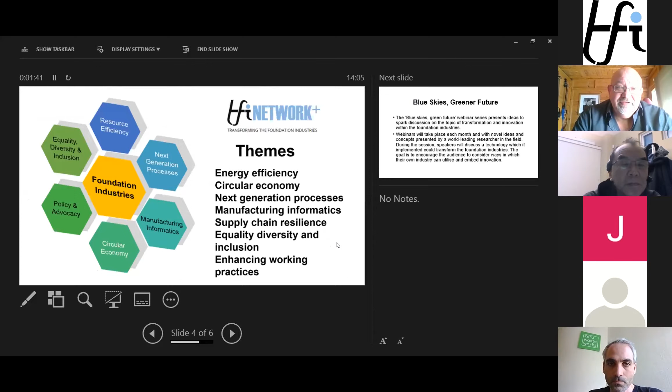And today's lecture from John fits into one of our major themes, which is to look at next generation processes and concepts that could influence the foundation industries. If I go to a more succinct description of what we're going to try and achieve with the Blue Skies Greener Future webinar series, topics of transformation and innovation within the foundation industries. We're going to have a lecture each month. We'll probably have a break over summer that will start again in the autumn.

Each speaker is a genuine world leader. I'm not just blowing smoke there. John is a real world leader in cement research and technology, who's at the University of Sheffield. And each of those leading speakers is going to present some potential transformative aspects for the foundation industry. And it's blue skies. It's not something you might consider to introduce tomorrow, but it is something that is worth considering for the future and could be absolutely game changing. And that's the purpose of these webinars, starting with John's talk today.

I'll let John introduce his title, but I will, as is customary, introduce the speaker himself. You can read what I've written here. I've stolen this from his webpage, so I think it's reasonably accurate. John is an Australian, or has an Australian background. He got his degree, chemical engineering and applied mathematics from the University of Melbourne. Disappointingly in 2002, I think my degree was significantly before 2002. His PhD was in chemical engineering at the same institute.

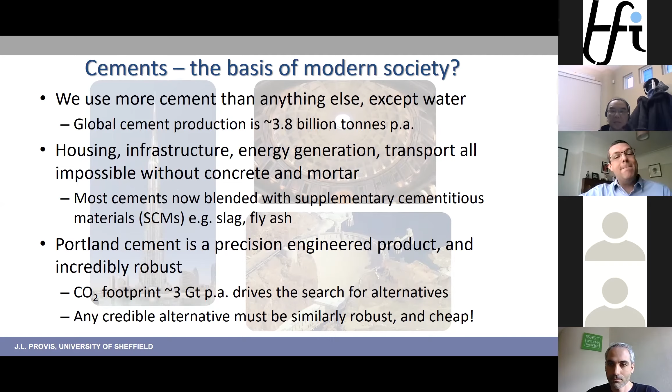I describe it as one of the closest things to magic the human race has managed to come up with. And I say this not understanding how magnets work. They're magic as well, by the way. Cement is a magic material and we can't lose sight of that.

So if we look at where we are now, what's our current status as we are assessing the CO2 footprint, assessing the emissions footprint overall of the built environment, which is where we use most of our cement. By the way, it's roughly a 3-way split as we're using cement between reinforced concrete, so concrete with steel in it, unreinforced concrete, concrete blocks, concrete bricks, paving stones, tiles, these types of things, and mortars, renders, and other products that aren't concrete. Roughly split cement production 3 ways worldwide between those 3 categories.

If we look at the building stock, you can see greenhouse gas emissions per building for a new construction, the construction and maintenance segment of that. I'll pull up the laser pointer so I can wave at some of these things. So the construction and maintenance section of the building breaks down into all the bits and pieces that go into it. Concrete is that slice, and there are various contributions to 1 cubic meter of concrete, the CO2 footprint of that. And then you take cement, being by far the largest component of that, and break that down into actually where the emissions are coming from in producing cement itself.

By the way, these figures come from a paper that we developed through a United Nations Environment Working Group on low carbon cement and concrete. If anyone would like a copy of this, please drop me an email. I know not everyone subscribes to this. It's quite a new Nature Publishing Group journal, Nature Reviews Earth and Environment. I'm happy to email out copies of this upon request.

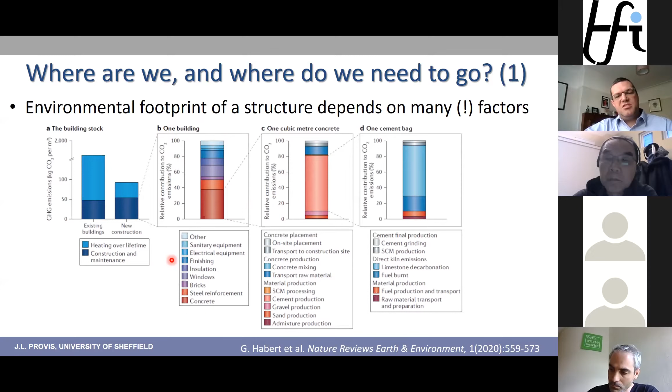So as we're looking at the different steps in this value chain, as we're trying to innovate sustainably, the question is, how can we use everything we know here to develop a value chain that works sustainably? There are many points in this value chain that we can attack for this. Where we need to get to, well, by 2050, we've got a legally binding target for net zero. So that's unquestionable. We need to do that.

The large process facilities that are producing cement, and a medium-sized cement plant is in the hundreds of thousands of tons per year throughput scale, which is absolutely mind-boggling to those involved in most process industries to think about processing multiple hundred thousands of tons per year of a powder product. These facilities are capital intense. They're designed to operate for 40 years or more. There are cement plants in the UK that have been operating for more than 90 years, replacing, retrofitting, reinstalling new equipment on the sites. But equipment that was installed in 2010 will still be operating in 2050.

So is it already too late to fix the problem? Well, it can't be. To some degree, it is. To some degree, the carbon emissions are already locked in from this equipment because value on the assets has to be returned. But we can't possibly let this restrict what we're doing.

What we need to improve is every step in our value chain. We need to improve how we use concrete in structures. We need to design better. We need to improve how we use cement in concrete. We need more efficient materials usage to go into that structural design. And we need to better use materials to make cement.

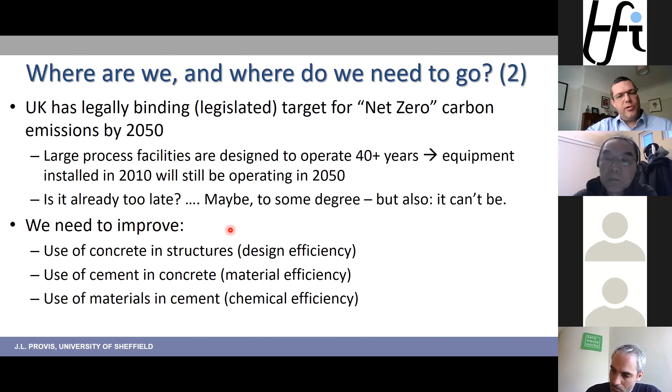But where are the opportunities to improve? This is a graphic and an illustration from that paper I mentioned before. Going from raw material extraction through to building use, demolition, recycling, recycled aggregates going back in, replacing part of the material in the concrete, and using alternative fuels. A cement kiln is an incredibly effective waste incinerator. Looking at alternative raw materials, looking at blending with all sorts of different things. There are opportunities everywhere. And what we need to do is to exercise the right opportunities.

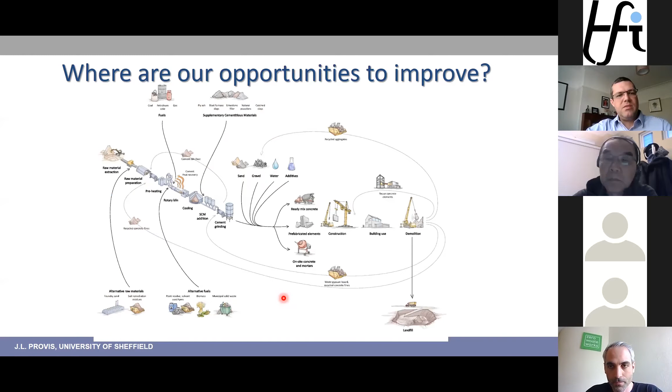So here's some assessment that we looked at with designing buildings better. So designing for reuse, or designing each element of a construction using different concretes more flexibly, and maybe using precast elements more flexibly, design each part of a building to withstand the actual type of exposure, environmental exposure, that that piece of the building is going to be exposed to.

So current practice in a lot of building design is to use a couple of grades of concrete for the whole building. So say if you're building a high-rise construction, 8 floors above the ground, you've got concrete elements that are designed to withstand the splashing of the salt that's put on the road for de-icing in the winter. Now, if you're splashing 8 floors up, you've done pretty well. That's better than Sheffield traffic will give you.

But we need to bring in, even at that design level, more subtlety, more sophistication in choosing and specifying how we're putting together a structure, whether it's with an integrated structure, whether it's elements that are going to be reused, rather than building a set of shoebox apartments in the city centre and then coming along 20 years later to knock them down and crushing up the concrete into lumps. Even if those lumps are recycled, you've got a concrete that was designed to last maybe 50 to 100 years, and you've demolished it after 20. So those elements can be reused. We can optimize structures, optimize structural design instead of just a rectangular cross-section, something a bit more clever with them.

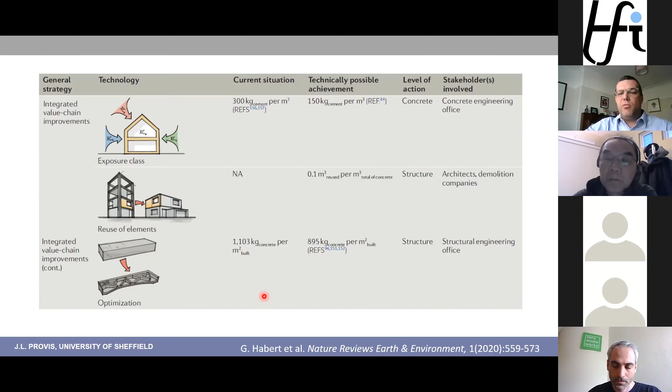Now, those structural engineering aspects are... I introduced myself as a chemical engineer. I've talked a lot about structural engineering here. I am by no means an expert in structural engineering, nor do I pretend to be. But it's essential for those on the materials design side to think about how exactly we're going to be using

the material. So when we look at using cement clinker, cement clinker being what comes out of the Portland cement kiln before it's ground, we've got as demolition waste a source of raw material that may already be partially or largely decarbonized. It's had the CO2 removed already. But can we reuse demolition material fines as a raw material to make cement? It's limited by the composition of the raw mix, but this does look possible.

We need to pack particles together better into concrete. So we look at, as a functional unit for concrete performance, how many kilograms of cement per cubic meter per megapascal of 28-day compressive strength. At the moment, 8 is about the figure we're looking at. Figures of 4 have been demonstrated. So we can get the same performance from the concrete in a normalized manner with half of the cement content by better packing the solid particles we're putting in there so that the aggregates pack together more tightly, still having a flowable material.

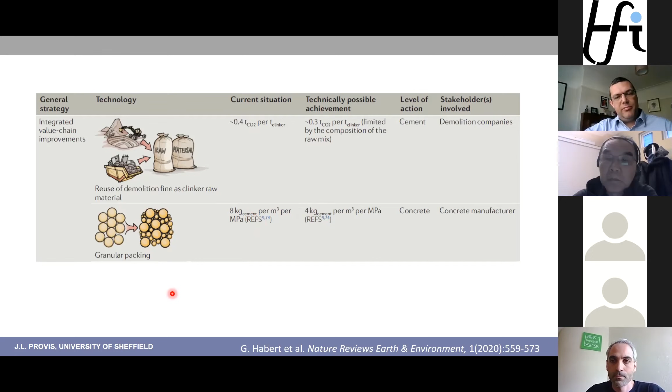We can improve the energy efficiency of clinker production. Again, I said that we're already doing pretty well. There's a bit of scope there. By using alternative fuels, we can reduce the attributed CO2 per megajoule that goes into actually producing the kiln.

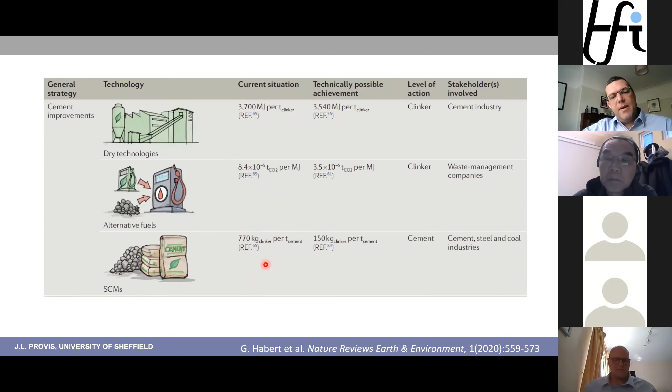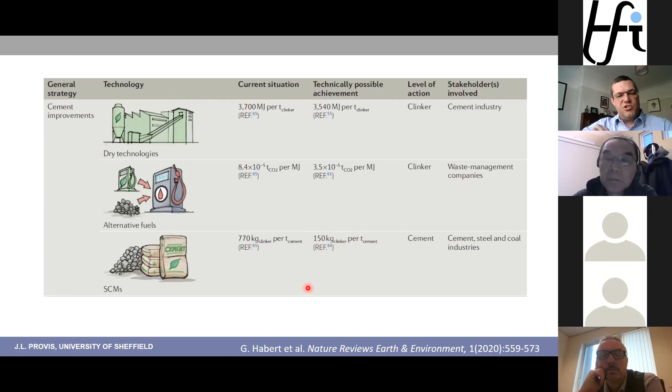Blending with supplementary cementitious materials, if we can source the materials, we can reduce our clinker content per tonne of cement from a current level of about 770 kilograms of clinker per tonne of cement, the cement being roughly 77% Portland cement kiln product and 23% gypsum and supplementary materials. We can change that to as low as 150 kilograms of clinker, so 15% Portland cement in a tonne of cementitious material, if we can find the slags, the ashes, the calcined clays, finely ground limestone, all these things that we'd like to blend to reduce the CO2 footprint, to reduce the clinker content of our cement and therefore our concrete.

We can look at carbon capture and storage. And there's actually a roadmap, and it's a really interesting read, in the UK cement and concrete sector, a roadmap to reach net zero, which leans very, very heavily on carbon capture and storage and requests funding from the government to please support us to achieve this. Now, a cement plant is one of the best places to implement carbon capture and storage if that's what you're looking to do. Very CO2-rich flue gas stream. But there are a lot of technical and techno-economic challenges around carbon capture and storage that need to be solved.

My personal opinion is we can't rely on carbon capture and storage to get us where we need to go. I don't think carbon capture and storage will do enough for us that it can be a key pillar of where we're going. I very much hope I'm wrong. I hope that it's a valuable part of our toolkit for carbon reduction, but I don't think we can assume that it will solve as many problems as it's being proposed to solve. Again, for those in the sector, those involved in CCS, please prove me wrong on this. I'd love to see that.

We can look at alternative cements. And it is technically possible to produce cement at 0 CO2 attributed emissions. It's not easy. A lot of alternative cements are looking at savings between 20%, 40%, 60%, some up to 80% savings. Now, in most industry sectors, if you say, oh, I've got an option that will save 20% of CO2 emissions sector-wide, you'd be having people bashing your door down.

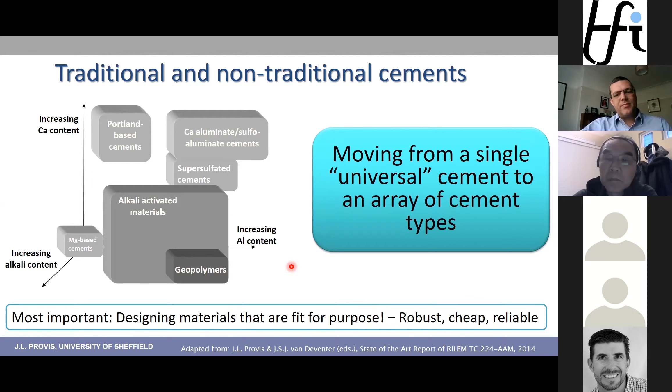So what I'm putting forward here is a toolkit approach, an array of different types of cements that we can choose from, that we can use, that we can select which cement will do this job the best at the lowest CO2 footprint and at an acceptable cost. These are questions that are not often enough asked, and these are questions that need to be asked more often. And I believe they will be as we move forward.

Do we want one size fits all? There are drawbacks of one size fits all. I say this as the parent of a 4-year-old who's tried to find one size fits all hats for a 4-year-old. One size does not fit all.

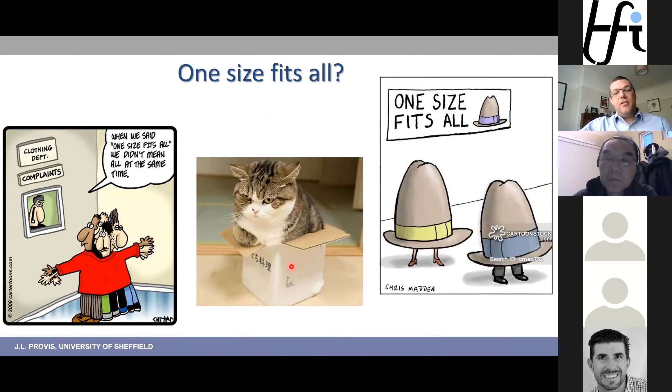We have worldwide, even within the UK, but particularly looking worldwide, differences in climate. So sometimes we need to design cements for freeze-thaw load. Sometimes we need to design for hot, humid marine conditions. Sometimes we need to design for hot, dry marine conditions. Some places have very sulfate-rich soil. Some places have no sulfate in the soil. All of these things are important in how we select our cements.

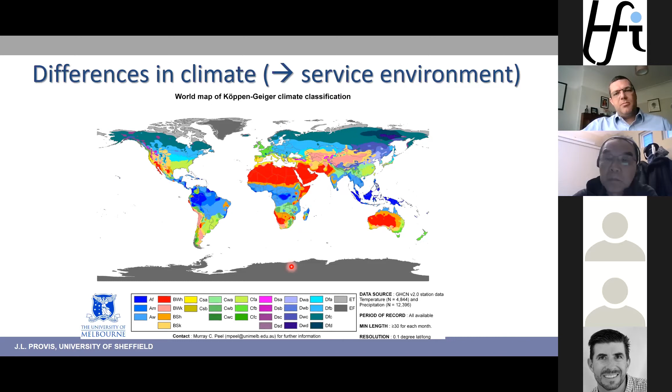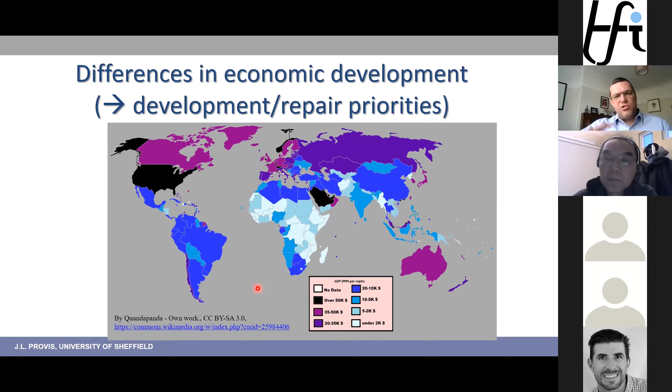Some countries, their main priority is development. Some countries, the main priority is repair or retrofitting, depending whether the infrastructure is already in place or whether the infrastructure is being developed for the first time. GDP per capita is a moderately terrible proxy for this, but it's not completely wrong in most cases. So we need to ask, actually, what are we trying to do with the material? And critically, we need to ask which mineral resources are available.

Cement is a mineral-based material. We use limestone, we use clays, shales, we use some sand, we use all sorts of other things as modifying materials. If we are going to use blast furnace slag, we need to be somewhere where there's iron ore nearby or being imported. If we want to use coal fly ash, we need to be somewhere where there's coal nearby or being imported. So we need to understand the mineral resources that are available.

There's been some discussion that one of the limitations on development in India in the coming decades may actually be the Indian subcontinent running out of usable high-grade sources of limestone to make Portland cement out of. You don't think of limestone as being a limited resource, something that you're going to run out of anytime soon. But we need to consider this.

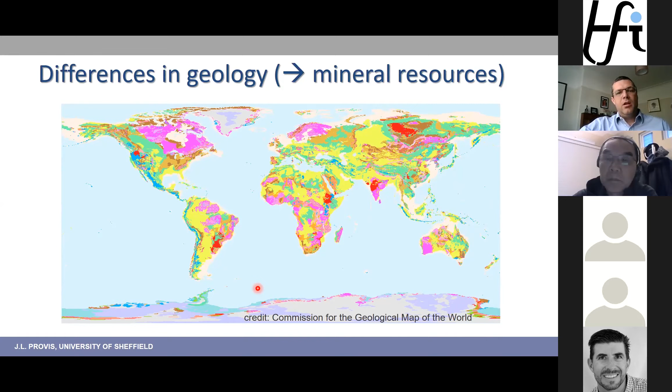So I talk a lot about alkali activation, and this is one of the classes of innovative cement that we look at. One of the big classes that we look at is alkali activated cements. And it starts from the starting point of, we've got these high volume, widely understood, widely recognized mineral powders that we blend with Portland cement, that we call supplementary cementitious materials. And if we would just mix these with water, they react a bit too slowly to be useful.

They're diverse materials, mostly aluminosilicates, and they react with Portland cement because the Portland cement increases the pH up to pH 12, 12.5, 13 in a hydrating Portland cement. Very caustic environment within a reacting cement. That elevated pH starts the reaction of these supplementary cementitious materials. They contribute to strength development, microstructural development, and so on. If we just mix them with water, they go too slowly. So we need to activate them chemically.

Now, in Portland cement blends, as I mentioned, you can blend very, very high fractions of some of these materials into Portland cement. Actually, in the current European standards, you can blend up to 95% of blast furnace slag into a Portland cement. So you've got a cement that is 95%. That's the extreme end. Let's say 80%. You've got a cement that is 80% made of a supplementary material. Even with fly ash, you got up to 55% blend fractions. And you get a lot of the performance of the cement from this supplementary material.

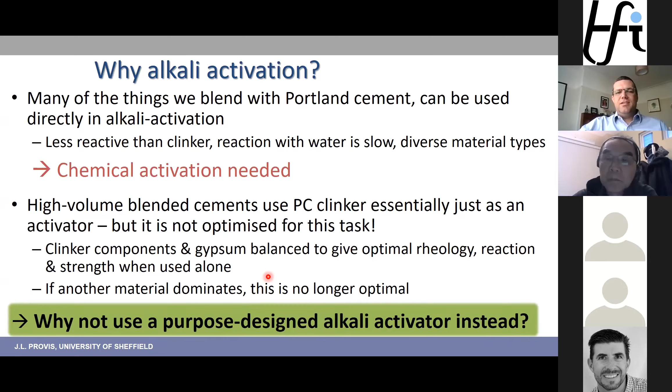The practice is, someone thought of this in the 1890s, and actually did a reasonable job of it. Jasper Whiting, working in Chicago, had access to blast furnace slags. Cements at the time were, I'd say, much more diverse than they are now, particularly in North America, because they were importing a lot of cements from Europe in barrels. So they're trying to find ways to make cements. Turns out he discovered they could use slag to do this, combined with an alkali.

Work in the former Soviet Union, particularly led out of Kiev, but deployed across Russia and some of the Central Asian countries as well, on alkali activation, the materials they call soil silicates. The driver there was a shortage of Portland cement after World War II. And that led innovation in slag-based and clay-based cements that have gone into, I'd say, a 14-story building built with unconventional cements.

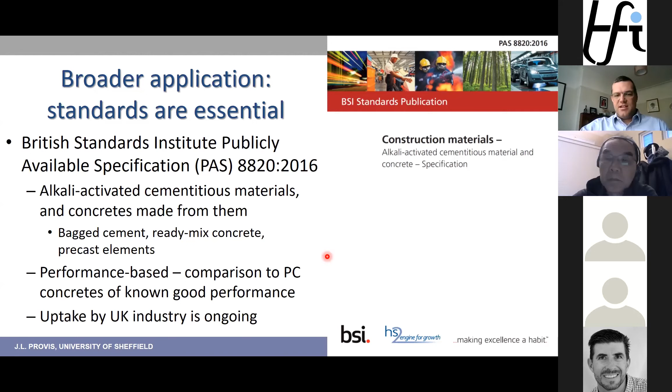As we head towards finishing, a few comments on sustainability, and on how we assess sustainability. There is an enormous diversity of published CO2 savings for alkali-activated binders, for all sorts of alternative cements, with published values ranging from 9% to 97% savings. I don't believe the 97%. I think they missed a trick or two in doing that calculation.

The 9% saving is a figure that's often raised as a criticism of all of this work on alkali activation. These people in southeastern Australia published that it was only 9% better. And that's true for their context. They did their calculations correctly, as far as I can tell. But in southeastern Australia, electricity is generated overwhelmingly from brown coal, at the time that the study was done a few years ago.

Burning brown coal for electricity is a little bit like burning dirt. It's wet, it's low calorific value, and it has incredibly high CO2 emissions per unit. So if you're moving to, let's say, electrical-based production of the chemical activators to use in an activated cement, and you've got the world's dirtiest electricity, as my home city of Melbourne kind of proudly does, then a calculation like that may work. If you're in a country with a different electricity generation mix, these figures will shift.

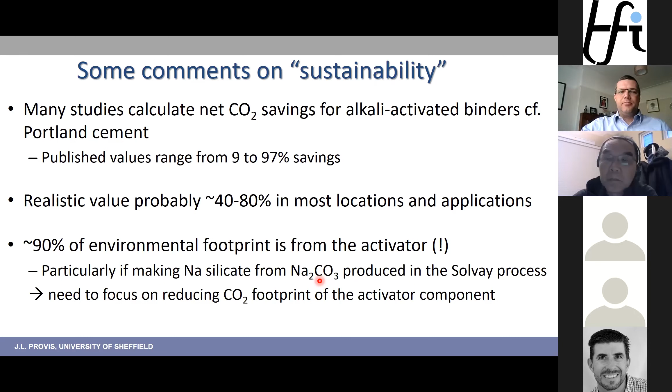So we need to improve the CO2 footprint of the activator itself as well, as part of this improvement at every step of the value chain that I was mentioning. So what do we really need? Well, we can innovate in cements, and we must innovate in cements to get excellent performance, however we choose to define that: strength, durability, sustainability. Most important thing is the right application for the material in the right location.

Sustainability requires getting it right on every length scale. So those who are involved at a chemical level and those who are involved at a structural level, who come from completely different disciplines and would rarely speak to each other, need to speak to each other. Conservatism is built into all of our standards, and we over-design materials and structures as a result. Is it better to be too durable or not durable enough? Usually it's better to be too durable.

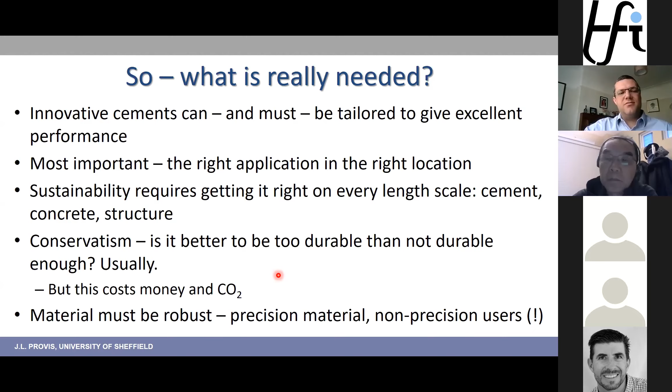But if you're putting a patch in a footpath that you know someone's going to be digging up next year to put another pipe underneath it, don't design that for 100 years. If you're going to be throwing up some student apartments that you know are going to be knocked down in 20 years because they look hideous, again, don't put 100-year service life concrete into those because it costs money and it costs CO2. You need a robust material because we have a precision material with largely non-precision users. As I mentioned, it's mixed in a wheelbarrow with a shovel sometimes, as well as factory production. And we need a material that will account for this.

So with that, I've certainly asked more questions than I've answered today, and I hope this is some useful food for thought. I'm happy to take questions. I've seen the chat box flashing a lot as I've been talking, so I assume there's some in there.